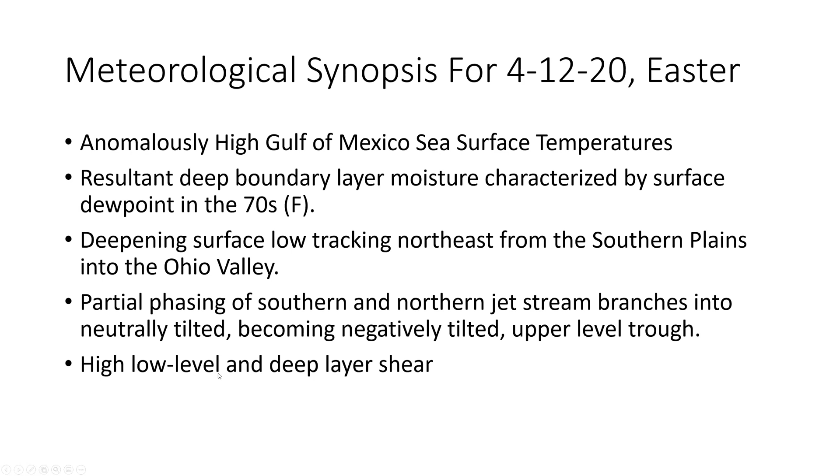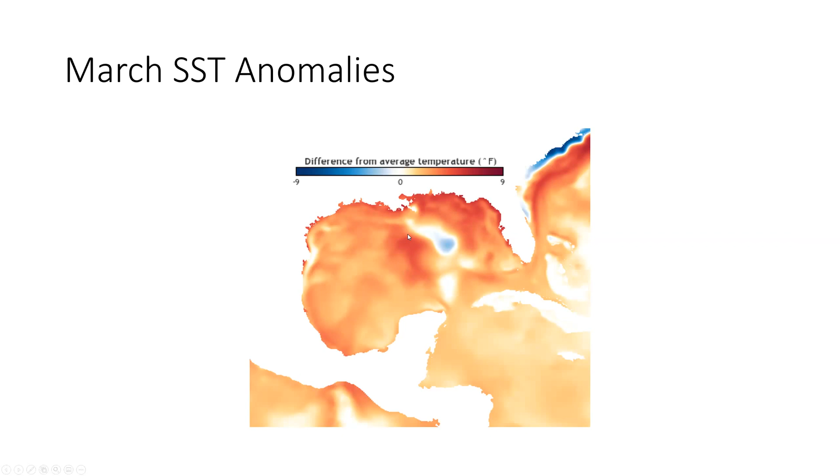So you can see we were solid 3 to 4 degrees Fahrenheit above average across the Gulf. Ignore the little blue spot, that's a little anomaly associated with the loop current, but it's not really representative. In general, very warm water across the Gulf, and that resulted in very deep moisture.

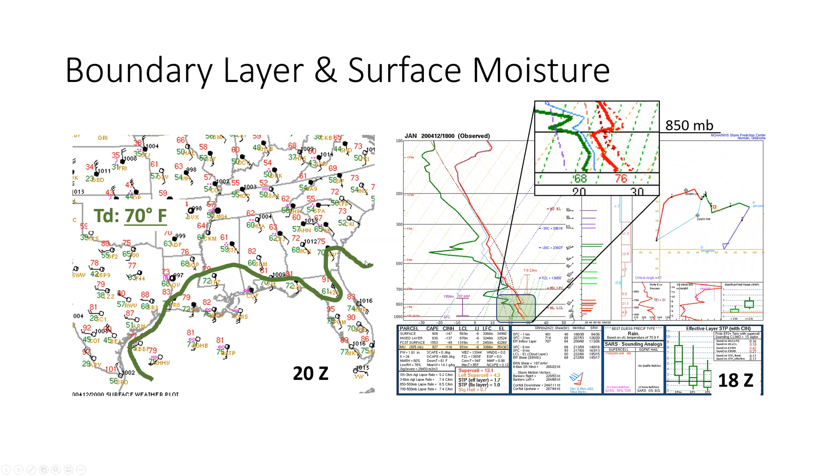So this is roughly where your low was moving. About 20Z it was located near Shreveport, moving northeast. You see your winds back a little bit there, south of Jackson. For those who don't know, Jackson is in Mississippi, west central Mississippi. The tornado was south of there.

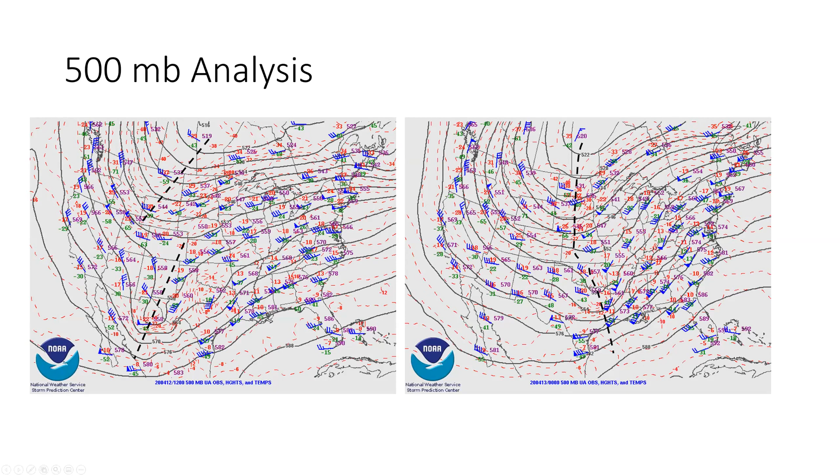This is the 500 millibar analysis at 12Z that morning and 0Z in the afternoon. You can see a 500 millibar trough in the northern stream, somewhat displaced from your southern stream trough. By 0Z, they're not exactly phased, not perfectly aligned, but much closer, and your southern stream trough is beginning to take on a bit of a negative tilt, which is going to increase the divergence and associated mass transport. So a very volatile situation was unfolding.

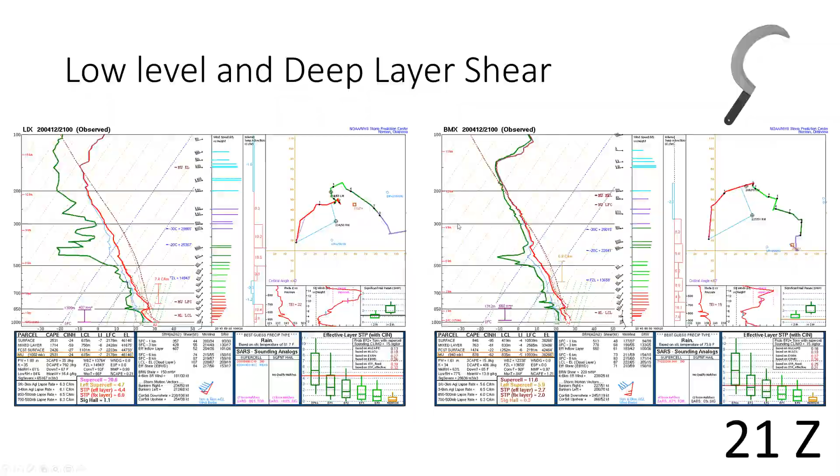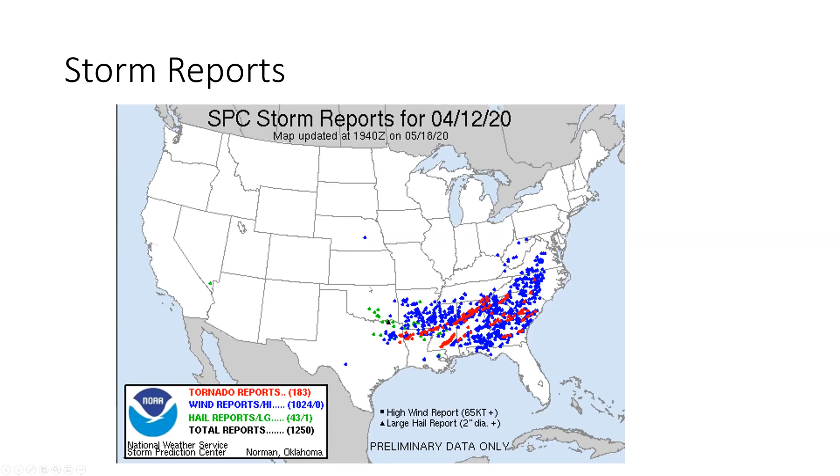Tornado from a long track piece of a line segment or quasi-supercell. And then, of course, the storms we're interested in today, that red track across the south, which was still inside that moderate risk and pretty well forecast by the Weather Service. So good job to those folks.

So this is what I'm really more interested in for this particular event, and I tried to hurry through that intro into the meteorological synopsis. Very volatile day. This is what's interesting to me in the following days.

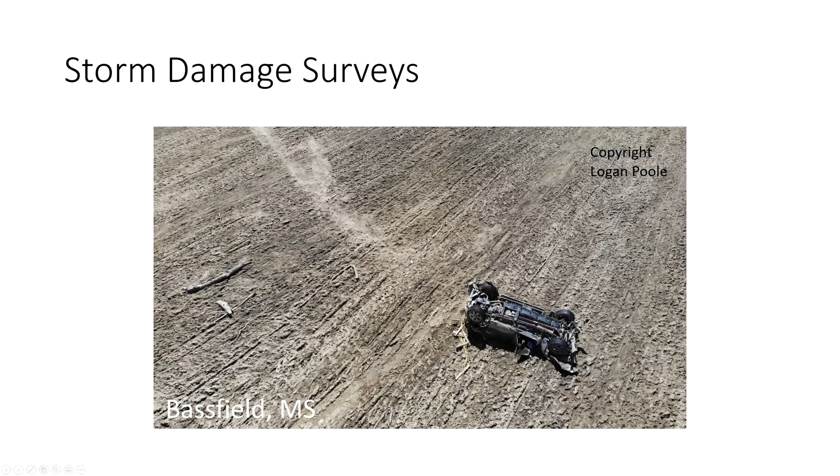This is a bit, let's see, I see a button. Oh, it's a chat button. Someone's out talking. Okay, sorry.

These trees were fairly defoliated.

A lot of debarking, particularly near where the core of the tornado went, and that's indicative of a strong tornado. You see that vehicle not in a happy place there. Again, a slightly different angle. You see trees laid in a lot of different directions, frankly.

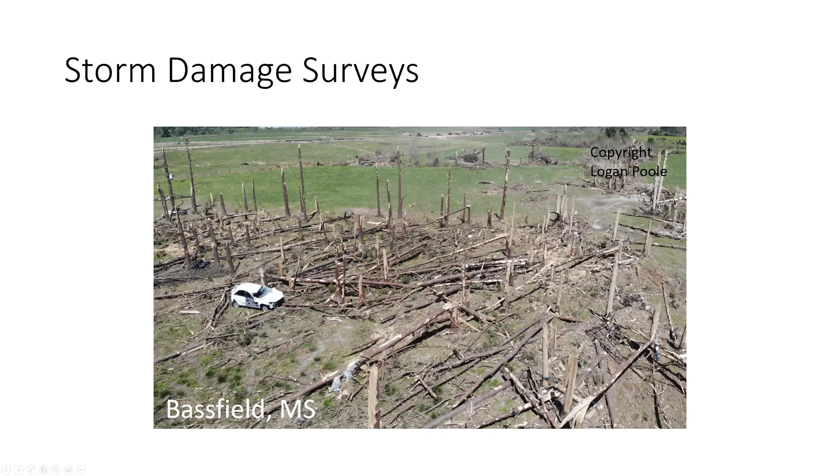So this is close to where the core of the tornado moved over near Bassfield, just to give you an idea of what it looked like when it impacted property. And this actually wasn't when it was the strongest. It was still a violent tornado, but not that high-end EF4.

The bottom right-hand portion of the picture, you can see what looks like railroad tracks almost. Those are the rails of a mobile home. So the mobile home is gone, and that's what's left of the rails of it.

You see multiple empty lots that were not empty, I assure you, mere days before. And you see the trees, of course, in a pretty damaged situation there. So a lot of course, this was a deadly tornado, and this is a portion of where it unfortunately hurt a lot of folks.

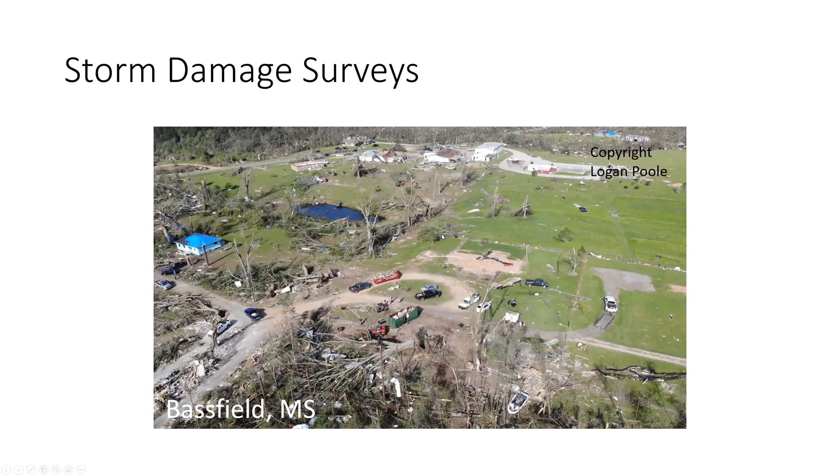When we look at tornado damage, there are certain things that we know correlate with tested degrees of damage. So we're looking at, is it power poles down? Is it transmission lines? Is it homes? Is it apartments, box stores, large span buildings, and so on? All these things have very specific indicators.

So what we're talking about today is how you differentiate between a strong EF4 and an EF5. How do you make that judgment call? So a couple of things I want you guys to pay attention to as we go through the video, in particular in a moment, are anchor bolts.

I'll point those out. Were the slabs swept clean? Debris loading, meaning how much of the impact was because there was debris impacting the structure that you're interested in. When we're trying to rate or assess tornado damage, we're more interested in the damage caused by the wind. So debris loading can cause that to be modulated in a way that maybe isn't always obvious. So we're looking at, and remember, also looking at the wall to the floor and the roof fastening. How are they connected? What's the construction of that? And then we're looking at the tree damage and the displacement, as well as debarking.

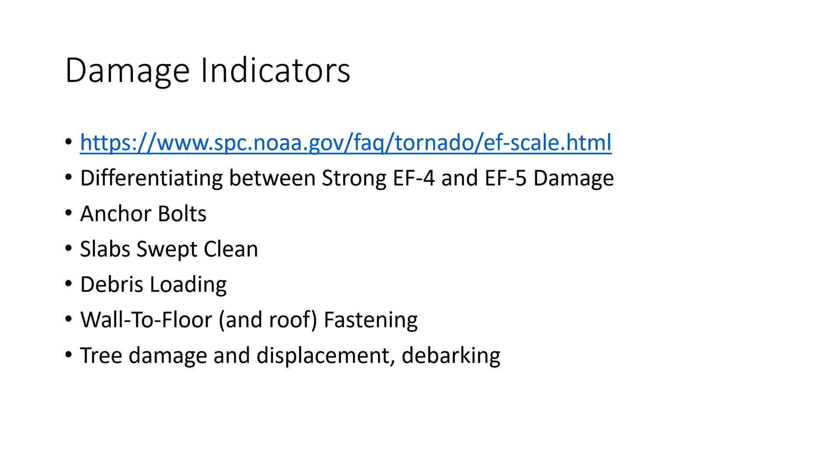So this is going to be just your synopsis, as if you were a damage surveyor for this particular area. We're looking at one building here, or one small section of the path. So imagine the poor weather service meteorologist having to do the whole thing. It's really difficult and a lot of work.

So we were following along this apparent tornado track, and we found a single floor residential home that was obviously heavily damaged. We interviewed the homeowner, who was also the builder. He built his own home, and he suggested that the construction of this building was superior to other similar buildings in the area. He told us that construction was his career. He was a construction worker. He owned a parts supply place, and he took great care in his design.

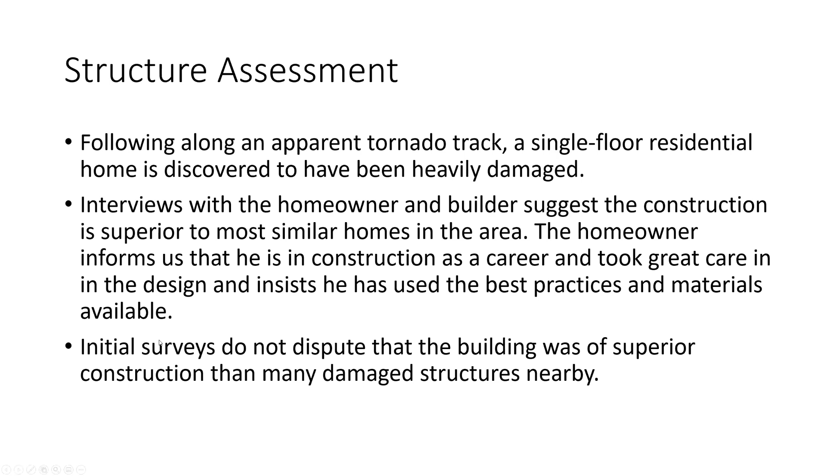And he tells us he used the best practices and materials available. He's very confident in that. And our initial survey of the property doesn't really dispute that this was the best built building in the area that suffered that kind of degree of damage. So at least for that area, it was fairly well built, as we understood.

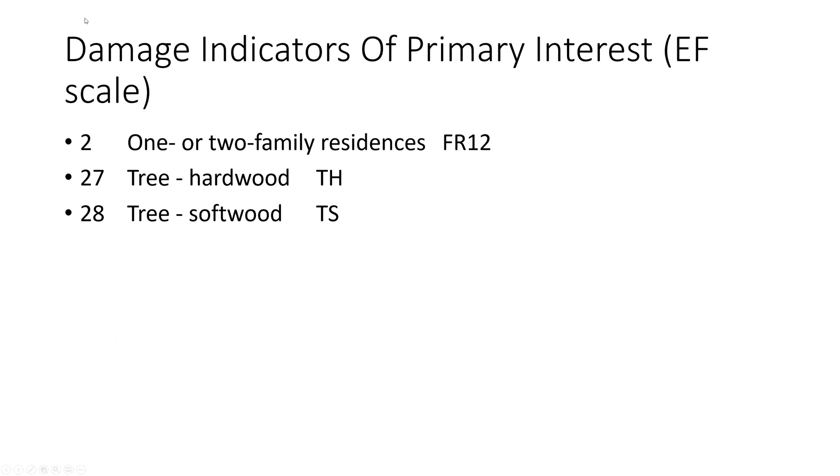So some damage indicators of primary interest here. I want you guys, we're looking at a single family residence, which has the code FR12 and the number 2 in the damage indicators. I'll give you guys that link later, and you'll see how that's all listed out. And then we'll have hardwood and softwood trees that we're interested in.

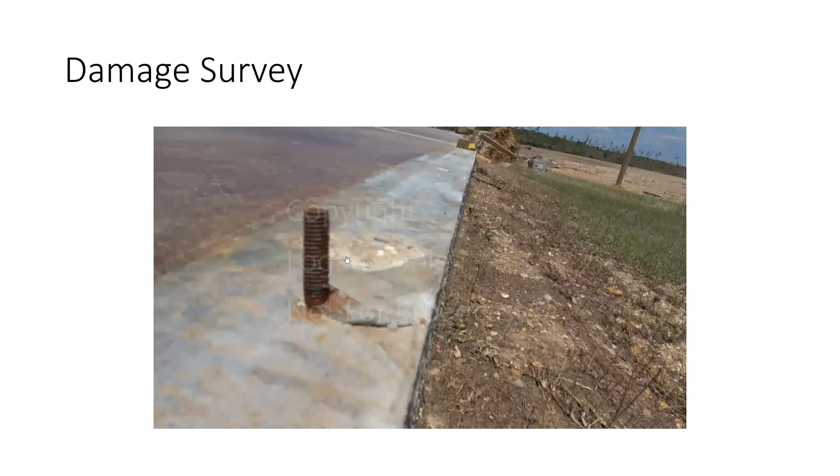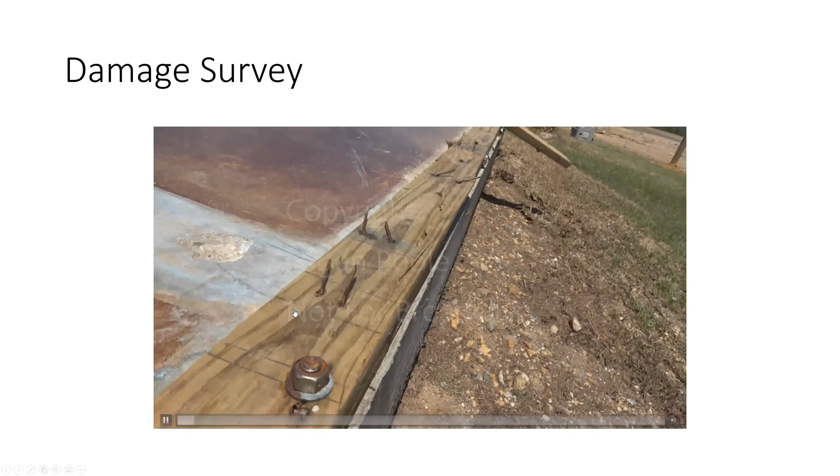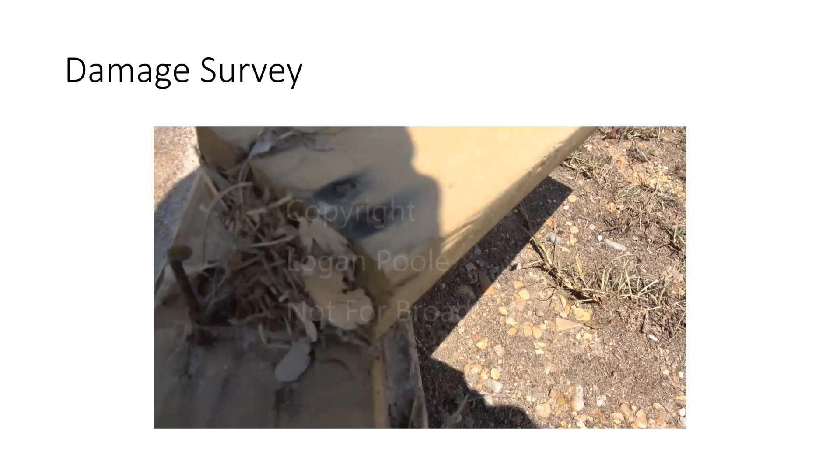So that is an anchor bolt, which takes from the slab there you see, it takes it up to this wood. This is a sill plate, which is what allows the wall to be connected to the foundation. And you see how that bolt there was attached. That is one of the 2x4s that comes up from the foundation and into the wall. Important how those are connected.

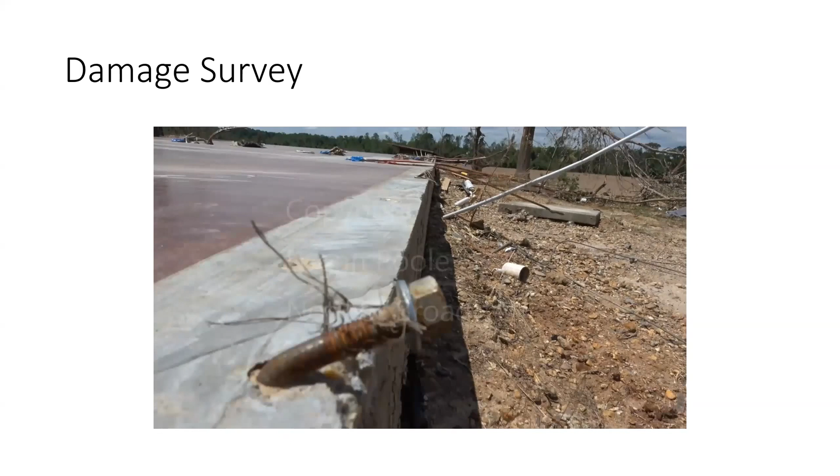And of course, you see that anchor bolt is bent, which is really important, but it still has the nut on top. So it didn't pull the nut out, but it did bend the anchor bolt. The fact that this property had anchor bolts is already showing potential strength of construction, and the fact that it was affected in some way is important. You can see just how far that car has moved.

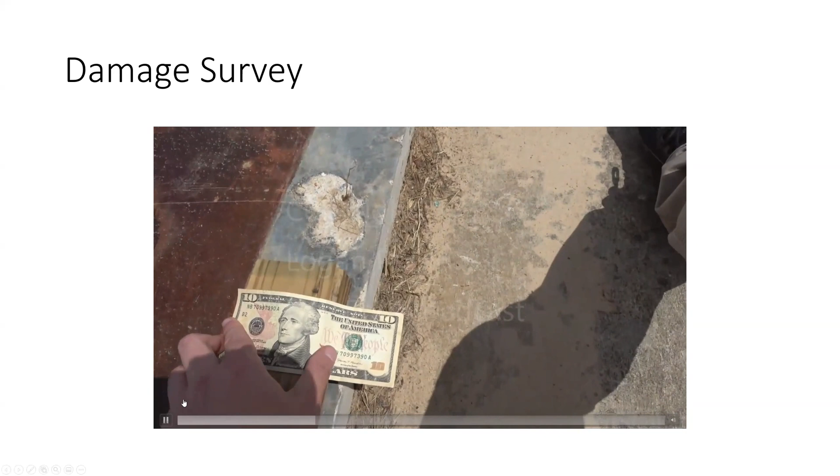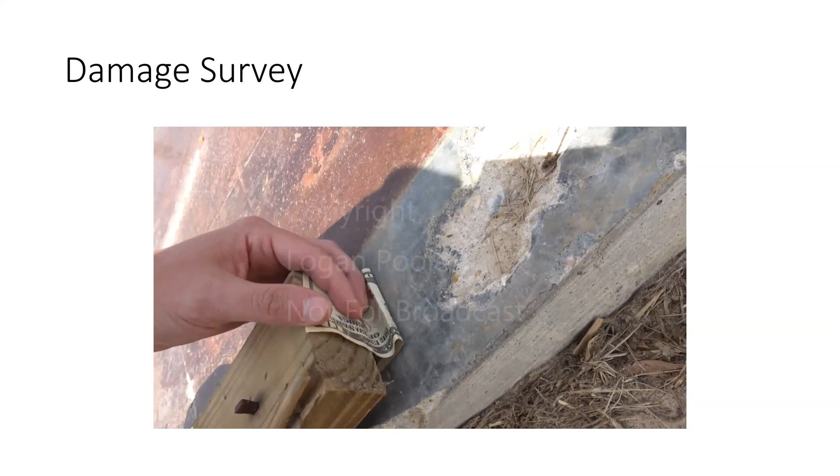Now, important to know that we discovered later that this car was in front of this house when it was displaced. I was using... don't be like me, carry a tape measure with you when you go to measure these kinds of things. Dollars and $10 bills are uniform, so you can use that to tell what size things were.

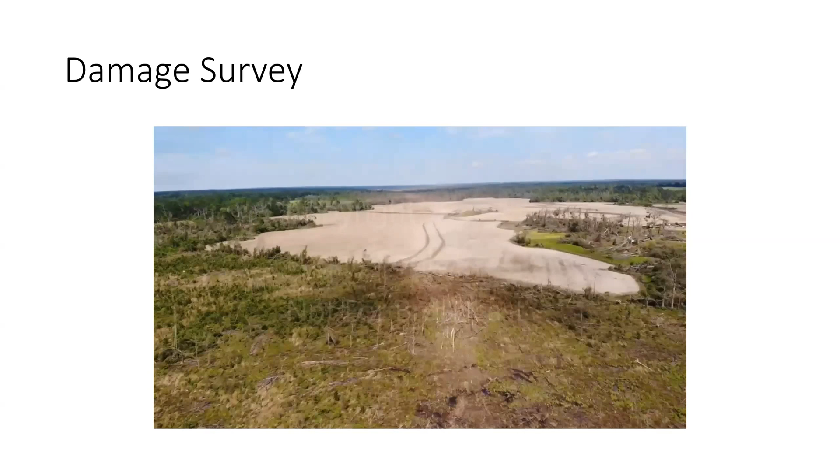So the important thing there that I was showing was that sill plate appeared to be a 2x4 as opposed to a 2x6, which would have had more surface area. So there's some room for the construction practices to potentially have been a little bit higher than they were. Still very well built as far as I could tell, but had room for improvement.

Now I want to pause this right here because I want you guys to look at it carefully. This is the tornado path through a forest. We actually had a couple of guys looking very carefully at this. This is something you don't get to see very often, but the forest, the softwood trees here, the pine trees, actually allowed you to see almost like a fingerprint, I called it, of where the tornado hit. You could see the circulation pattern there, which I thought was really interesting. Something we don't really get to see too often. It takes a tornado capable of leveling entire forests to get that kind of image. So let that play through just a moment.

These trees, if you notice, the root balls for one are still attached to the trees. The trees weren't snapped, but the tornado actually pulled them out from the ground. That's important, it's part of our damage indicator and some of the surveys we're doing. The other thing that's important is if you notice, the root balls aren't necessarily co-located to where they came out of the ground. Notice that tree next to the creek there - there's no hole there next to the tree. So that tree was completely uprooted and then thrown an indeterminate amount of distance.

Of course, you see some of those trees debarked as well, indicating again a powerful tornado.

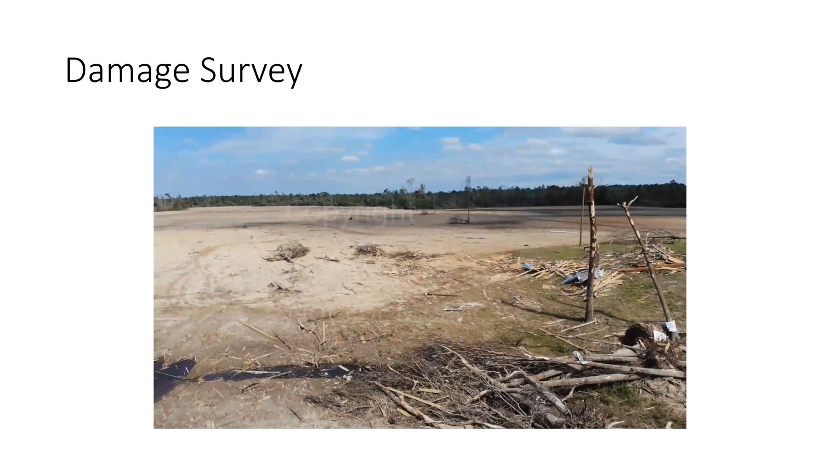And again, we come back to this vehicle because I'll tell you why in just a few minutes, but this is really important. So pay close attention to this as this video gets really close. I want you to look at...

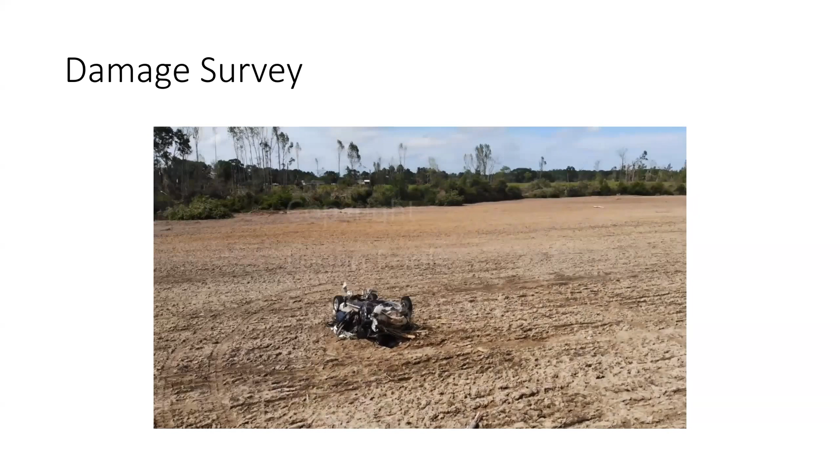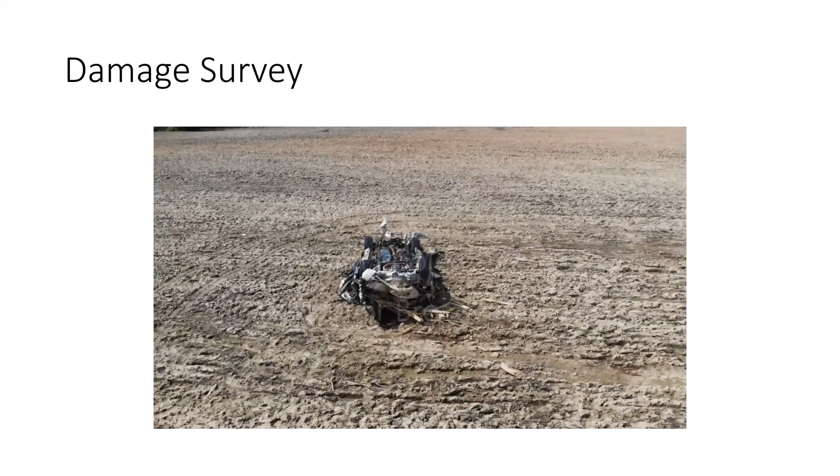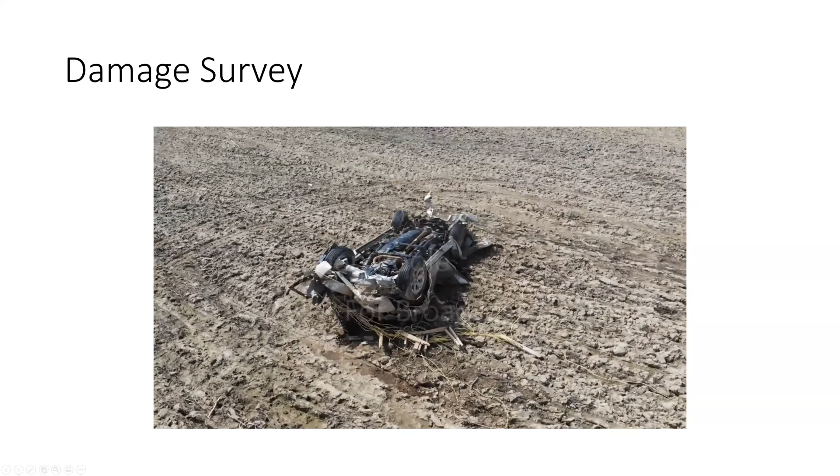It's wrapped in wiring. This is one thing I noticed very early on, and we discussed with several different contractors and independent agencies. What it appeared to me had happened, and this matched up pretty well with what the homeowner's record was, was that the car appeared to have been thrown through the building. So that may have contributed to some of its catastrophic failure. That right there is part of the home. That's wiring from the home that apparently became wrapped around this vehicle as it theoretically flew through the home. You can see another close view there.

So really important, we're talking about debris loading, and impact by a foreign object makes it difficult to understand just how strong a storm may have been.

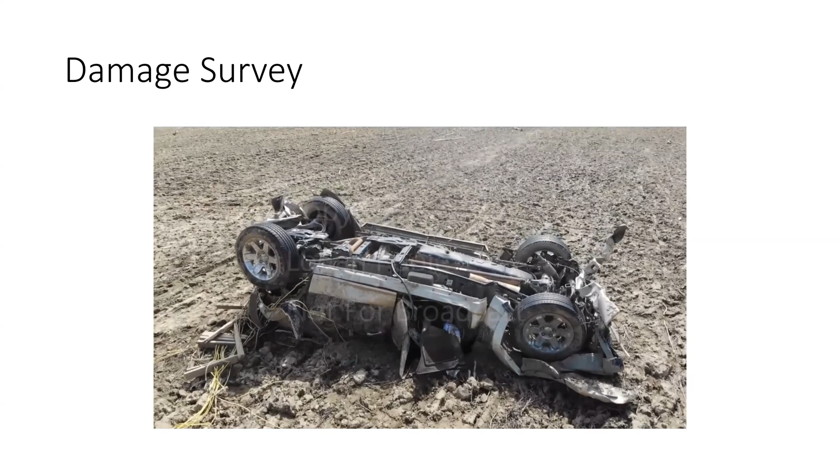So we're going to step through this. There we go. So what are the results like, right? When you're trying to do a damage survey, it's not always a certainty what the degree of damage is.

But we're trying to look at the ranges. So for example, we can look at this one or two family residences, which is the FR12 we talked about. So what we do is we say degree of damage, meaning what's the rating for what happened? Was it barely damaged, which would be a 1, or was it completely destroyed - a well-engineered building - which would be a 10? And then when you look at that, there's a range of possibilities, and maybe one structure is slightly stronger than the other. Maybe it's not exactly locked in or guaranteed that it was 100 miles per hour that did this.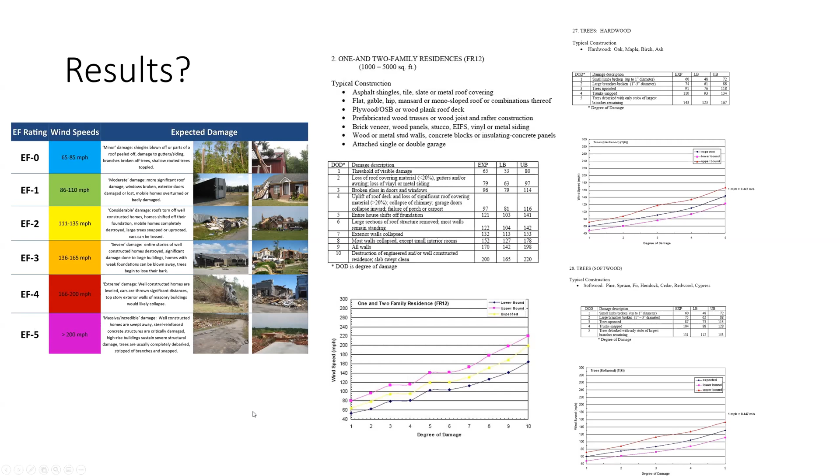So I believe the current Weather Service calculation for this was high-end EF4 for the Bassfield tornado damage. You can go look for yourself, and you can see where some of that is recorded in their damage survey—I'll try to make that available to you. Beyond that, it's still up for debate, and I'm sure there will be papers from people much smarter than me with engineering backgrounds who comment on that. But this is just a little intro into how difficult these surveys can be and what you have to look for, particularly when differentiating between high-end EF4 and EF5 damage.

So, questions and compliments. Sid, if you want to take over from here, the floor is yours, and I'd be happy to answer questions—we can go back and look at some videos and pictures if anybody's interested in that as well.